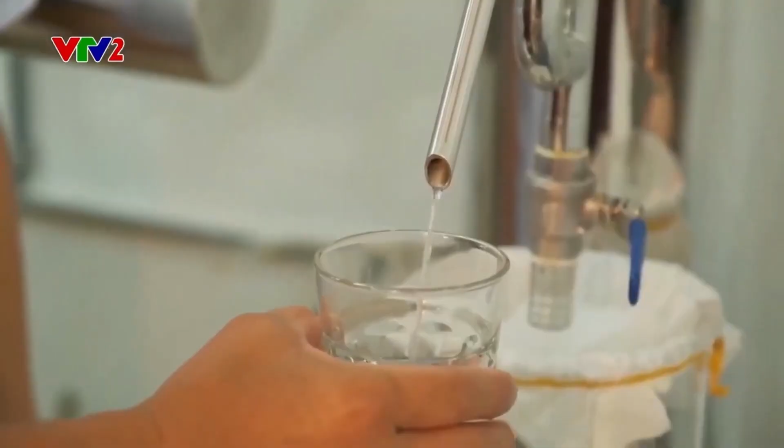Recognizing this, Thái An Engineering and Technology Company Limited, a member unit of Năm Sao Việt Science Technology Enterprise Group Joint Stock Company, a science and technology enterprise, has pioneered research and the application of scientific and technological advances into the clean liquor production process.

The company has built a clean liquor production process that is synchronous and closed-loop, fully ensuring food safety and hygiene conditions in accordance with the regulations of the Ministry of Health.

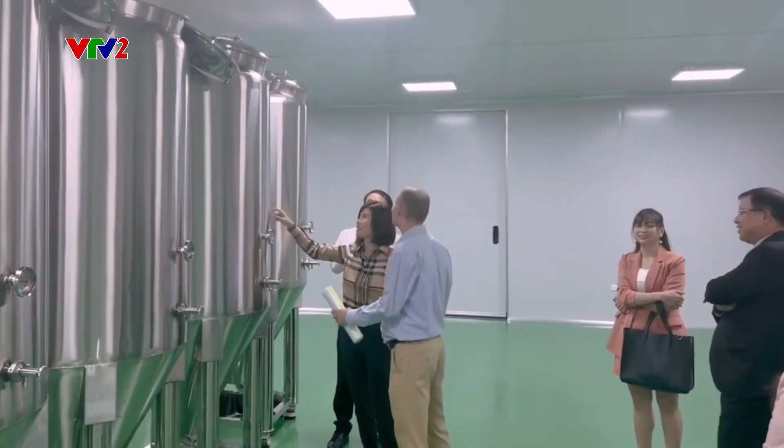Cooperating with Thái An in equipment investment and receiving the transfer of the clean liquor production process has opened up a blue ocean, a market area large enough to help Vietnamese liquor take the throne and bring business value to enterprises investing in this field.

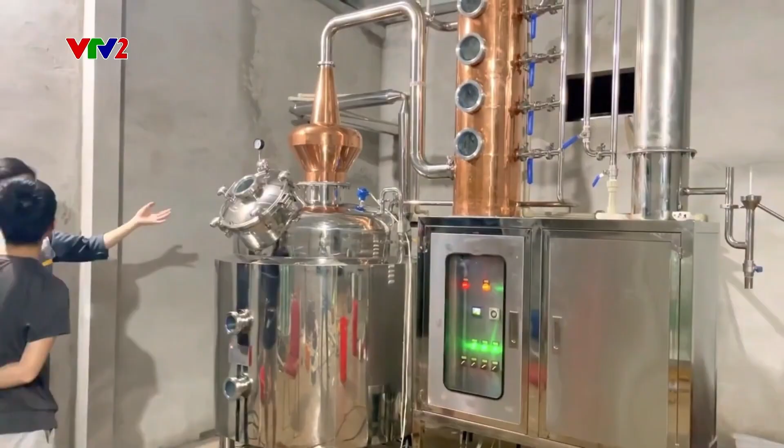It can be said that introducing a closed production process following the one-way production principle, standardized at all production stages, is the decisive factor for fermentation efficiency, contributing to increased productivity and enhancing product quality.

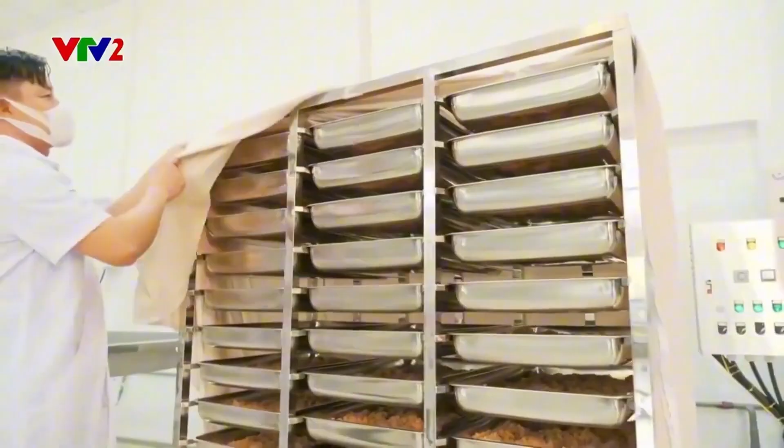The clean liquor production process, developed by Thái An, is an inheritance that selectively adapts traditional fermentation methods on a synchronous equipment line. The finished liquor retains the full flavor of the ingredients and ensures food safety and hygiene according to the regulations of the Ministry of Health.

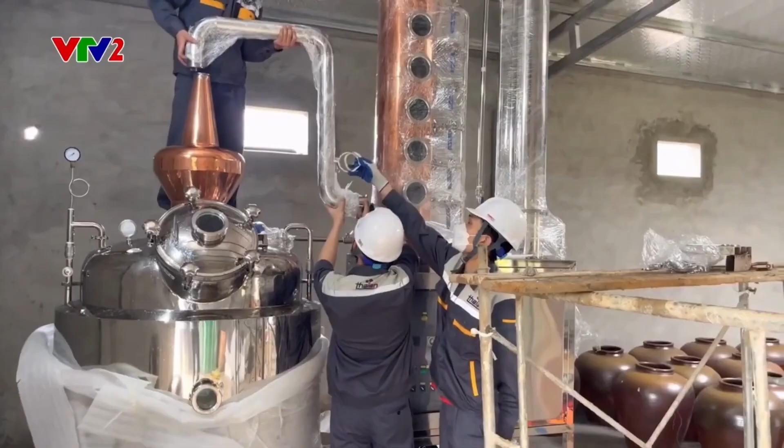To date, this technology has been certified by the Institute for Research and Development of Quality Standards of Vietnam, with many large-scale production facilities across the country applying it successfully and being well-received and highly rated by consumers.

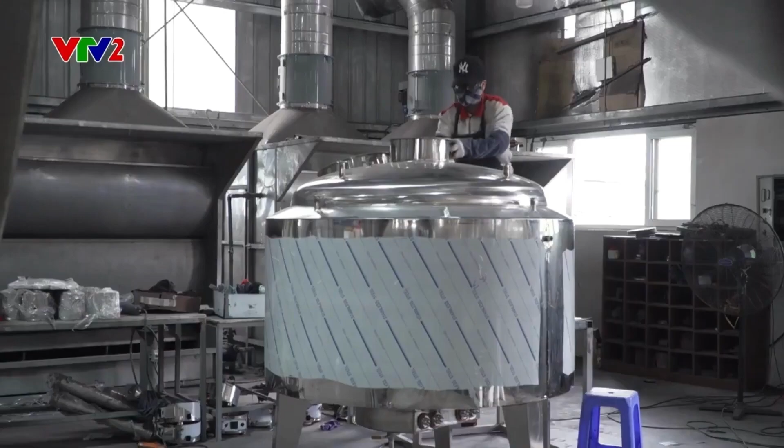To spread Thái An's clean liquor production technology further and make it easier for customers to access, we have produced this documentary to introduce to you in detail the clean liquor production process following the technology proposed by Thái An.

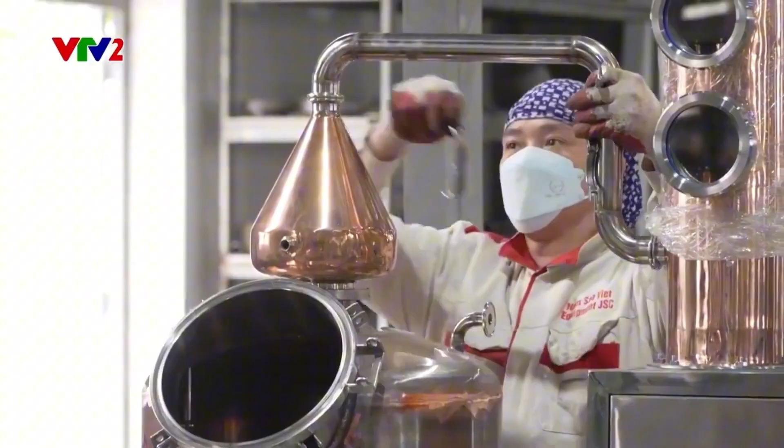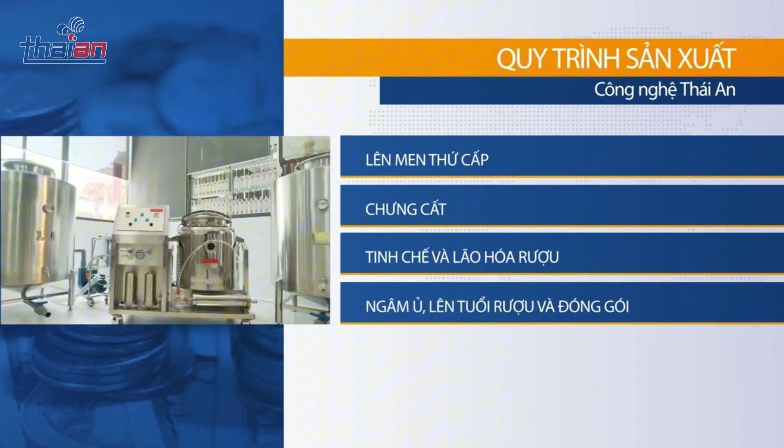Accordingly, the traditional rice liquor production process consists of 8 main stages. Step 1, ingredient preparation. Step 2, starch gelatinization. Step 3, yeast inoculation. Step 4, primary fermentation, the starch saccharification stage. Step 5, secondary fermentation, the alcoholization process. Step 6, distillation. Step 7, refining and aging the liquor. Step 8, aging to maturity and packaging.

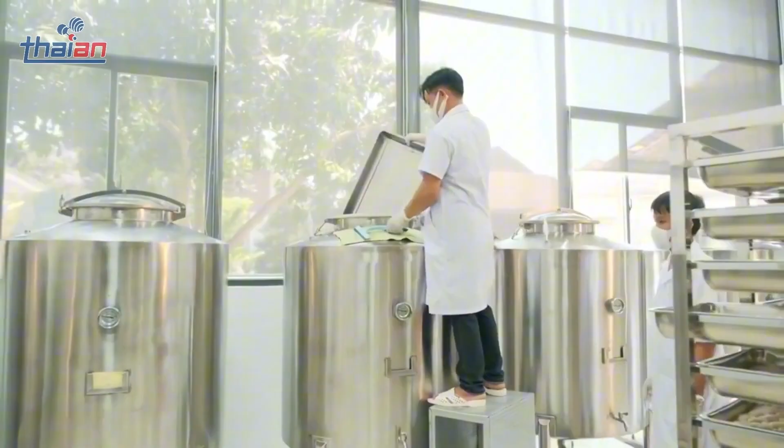The steps in the liquor production process are formed based on the method of producing traditional liquor of Vietnam, consulting with leading experts in the field of producing alcoholic beverages, ensuring food safety and hygiene conditions. The entire production process is carried out on a synchronous equipment system designed, supplied, and transferred by Thái An. The details of each production step are as follows.

Step 1: Ingredient preparation. Ingredients are carefully selected by workers before processing to remove impurities and insects mixed in the rice, then washed and rinsed under clean water. This action, besides removing dirt, also helps limit the effects of chemicals used for anti-mold and anti-termite purposes during storage.

The rice, after being washed, is drained before moving to the second stage, starch gelatinization. Depending on the desired flavor, we choose one of two types of ingredients: white polished rice or brown rice retaining the bran layer.

Starch gelatinization is considered an important stage determining the result of the fermentation process. Creating a traditional liquor product using traditional herbal yeast requires higher starch gelatinization techniques compared to using other types of liquor yeast.

Depending on each type of rice, the water level, cooking time, and rice incubation time will vary. During the production process transfer, Thái An technicians will guide in detail and accompany the customer.

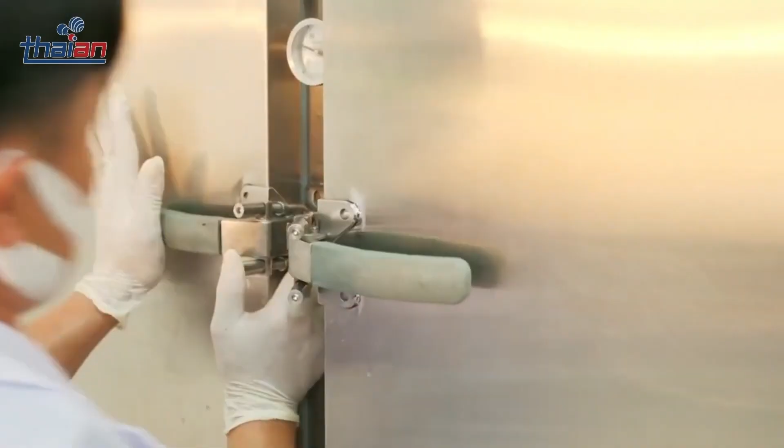The rice after the gelatinization stage must meet the following basic requirements. First, the rice must be cooked evenly, not dry, and not have an uncooked core. Dry rice affects the yeast absorption process, reducing the efficiency of converting starch into sugar.

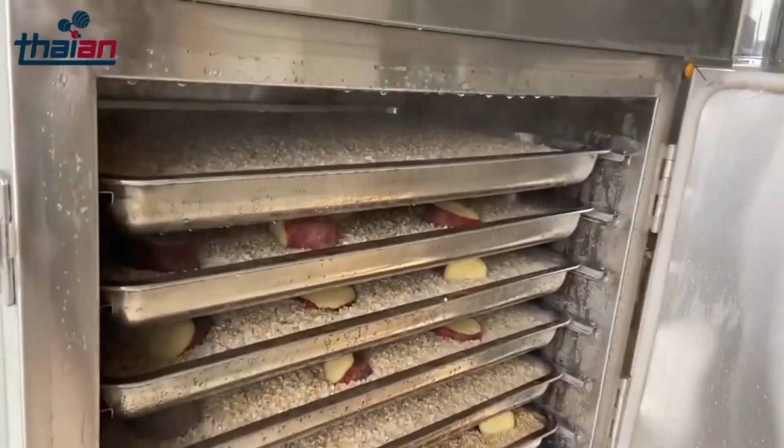Secondly, rice must not be kept too mushy or have grains break apart due to condensation. In this case, the yeast absorption process is poor, and foreign mold strains can easily develop, affecting the flavor and yield of the liquor.

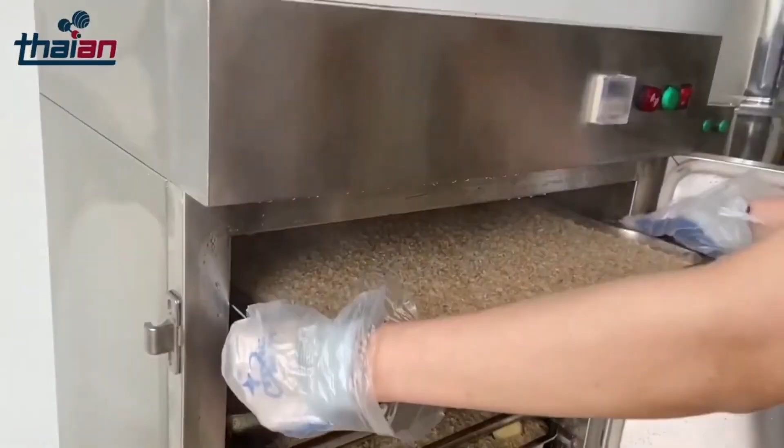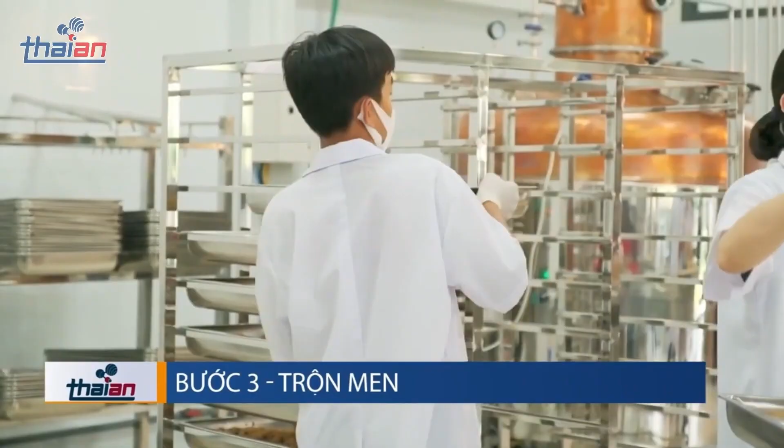Step 3, yeast mixing. Depending on the taste preferences of different regions, appropriate liquor yeast is selected. In Thái An's clean liquor production technology process, we recommend that customers research and aim to use northern yeast strains.

These are purebred yeast strains cultured in nutrient-rich substrates containing natural herbs, which resonate with the scent of glutinous rice to create the characteristic flavor of traditional liquor. At this stage, we need to note not to add yeast when the rice is still hot or the surface has dried out.

Step 4, the fermentation stage. The fermentation stage consists of two phases: primary fermentation and secondary fermentation. Before going into the details of each fermentation phase, we need to understand yeast and the nature of each conversion stage to optimize the entire fermentation process, aiming for the best liquor flavor with the highest yield.

For standard yeast, the yeast contains two common microorganism strains: mold and yeast. Each microorganism strain will perform a different task during the fermentation process. Mold will participate in the process of converting starch into sugar in an oxygen-rich environment. As for yeast, it converts sugar into alcohol in an anaerobic environment.

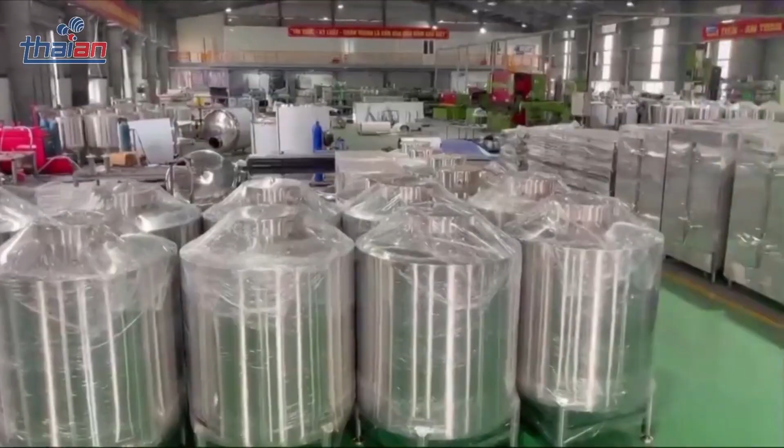Northern yeast has lower activity than other yeast strains. Therefore, it is necessary to use standard fermentation equipment to create a favorable living environment for the best growth of microorganisms. The primary fermentation process requires an oxygen-rich environment to help mold increase biomass production and generate many enzymes to maximally convert starch into sugar, limiting the symbiosis of foreign bacteria participating in the fermentation process.

The use of trolley racks and specialized multi-tiered trays from Thái An, with an optimized design where trays containing fermented rice are stacked on rack tiers, and the distance between trays is calculated so that air is continuously exchanged.

This helps to maximize the surface area of ingredients in contact with the air, creating favorable conditions for primary fermentation while making it easy to control temperature throughout the fermentation process.

In the secondary fermentation stage, in an anaerobic environment, yeast uses sugar to convert it into CO2 and alcohol.

Secondary fermentation, using specialized fermentation tanks, besides fermenting a large quantity of rice and liquor in each tank, helps save space and offers convenience in production, and also ensures an ideal environment for fermentation.

This includes ensuring an absolute anaerobic environment to help yeast maximally convert sugar into alcohol, preventing symbiotic microorganisms during fermentation, and overcoming the issue of sour liquor or the formation of scum on the surface.

Secondary fermentation undergoes two phases: rapid fermentation and slow fermentation. In the first 5 to 7 days, the product of the fermentation process mainly generates alcohol. After this phase comes the slow fermentation process.

Some esterification reactions occur, helping to enhance the liquor's flavor. However, also during this stage, if the fermentation tank is substandard and ingredients and yeast are not controlled, biochemical reactions will appear, creating unwanted compounds that reduce the quality of the liquor.

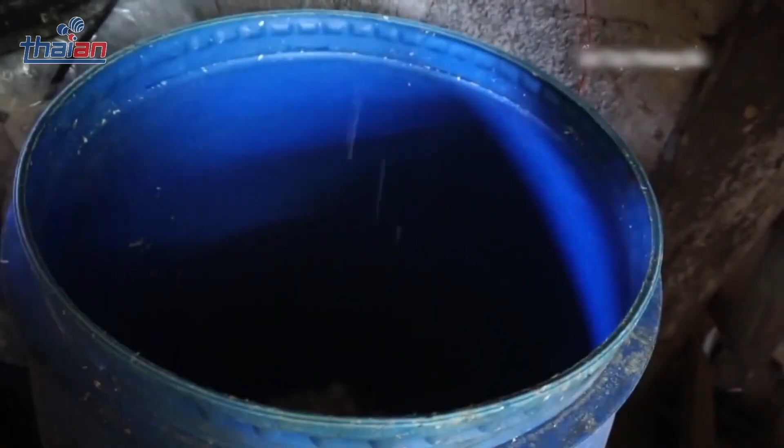A typical example is the intrusion of acetic bacteria, which use nutrients in the fermentation tank to create acetic acid. On the surface of the fermentation tank, much scum appears, resembling pickle scum or eggplant pickle scum, resulting in finished liquor with high acidity, tasting harsh and slightly sour.

Step 5, liquor distillation. Liquor distillation is the process of separating the mixture of alcohol and aromatic compounds from the solution based on the vaporization temperature of certain compounds.

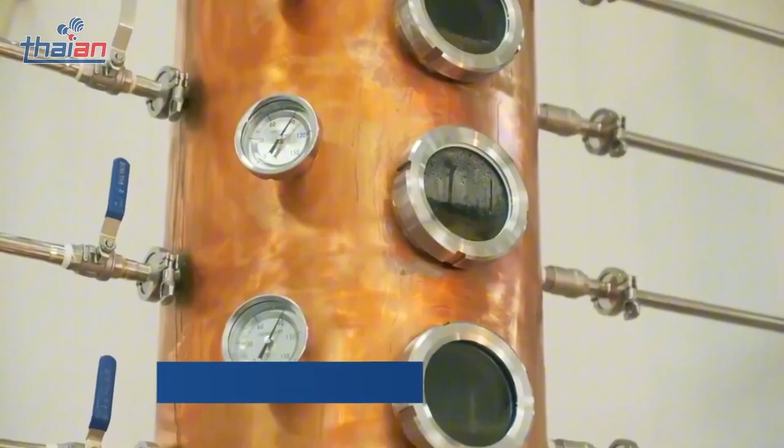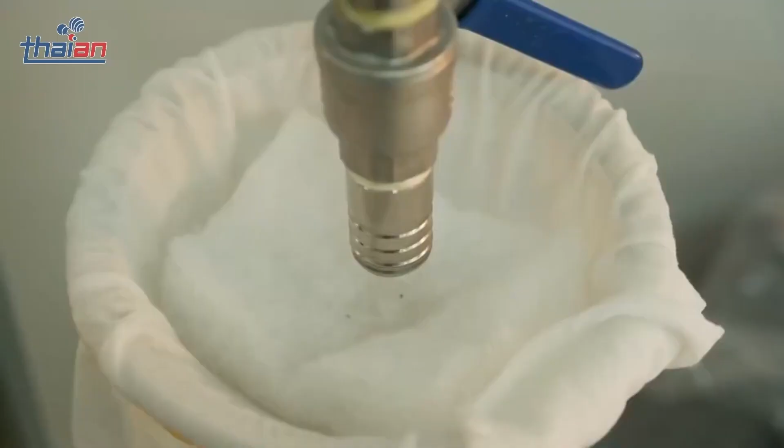With each compound having a different vaporization temperature, separating and recovering the desired compounds is not simple at all. In every country, there are different liquor distillation methods, each with its own advantages and disadvantages.

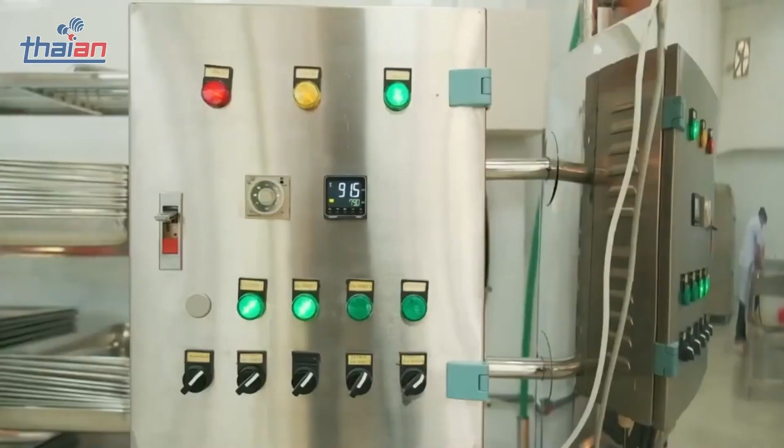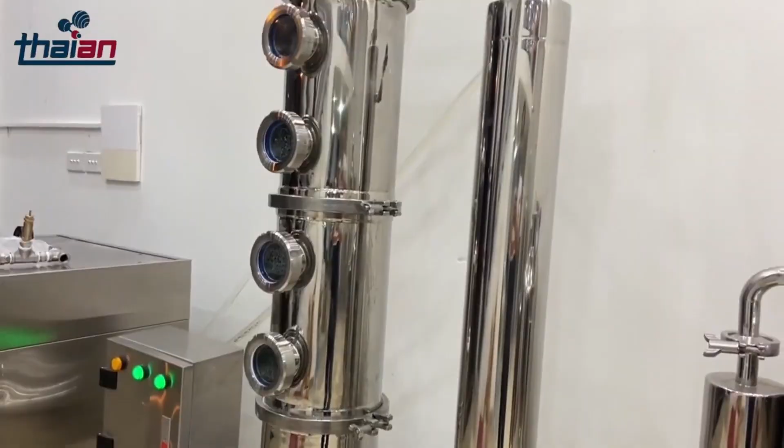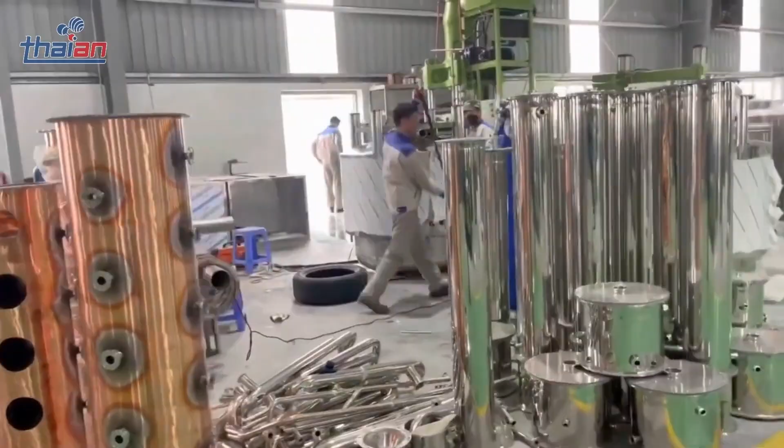In the clean liquor production process, Thai An's European technology multi-stage distillation tower is considered the heart of the entire process. This distillation technology is commonly used in developed countries, the homeland of world-famous liquor brands. It was researched, designed, and developed by Thai An Technology and Engineering Company Limited, Năm Sao Việt Group, since early 2017, with the desire to introduce advanced technology to preserve and enhance the quality of Vietnamese traditional liquor. Localizing this technology and popularizing it across almost all provinces and cities is gradually bringing true value to Vietnamese traditional liquor products.

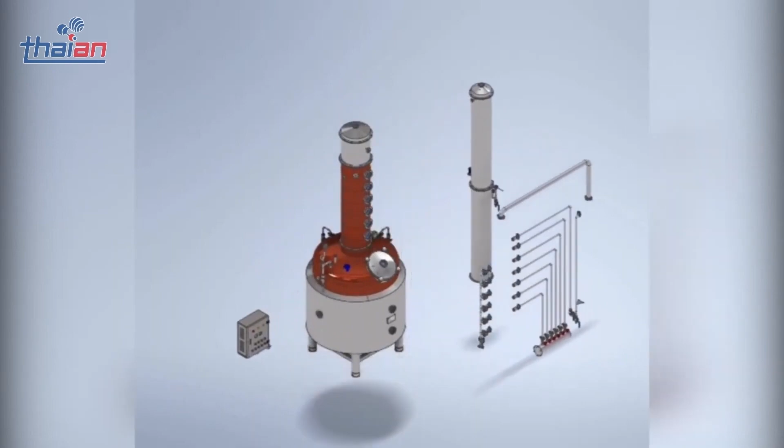Regarding structure, this equipment consists of 4 main modules: the raw material containment and heating chamber, the multi-stage distillation tower column system, the heat exchange system for liquor condensation, and the control module.

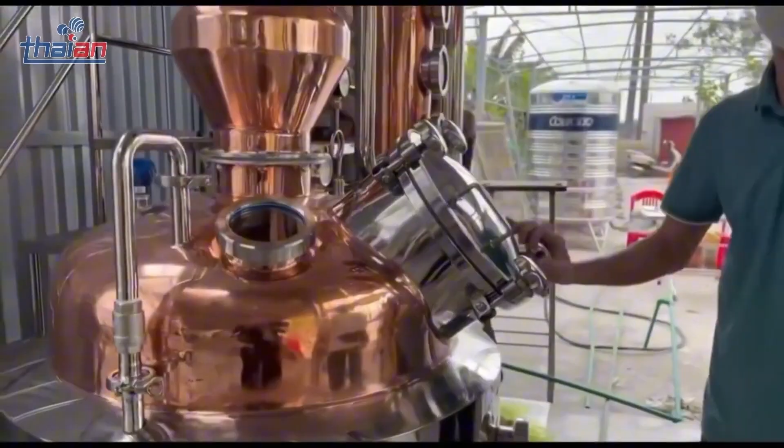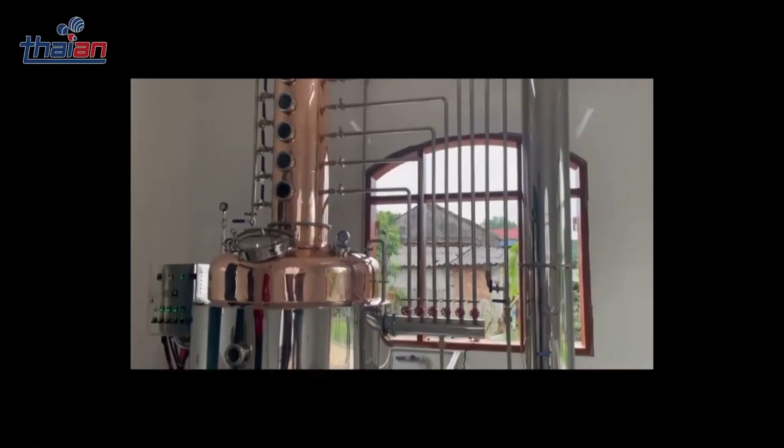The raw material containment and heating chamber has a capacity from 250 to 5,000 liters of fermented mixture, depending on the corresponding product code for different production scales. It uses diverse materials ranging from imported pure red copper to stainless steel, with standard thickness from 2 to 5 millimeters. Heating combines a 380 volt voltage source or saturated steam to optimize the fuel available at each production facility.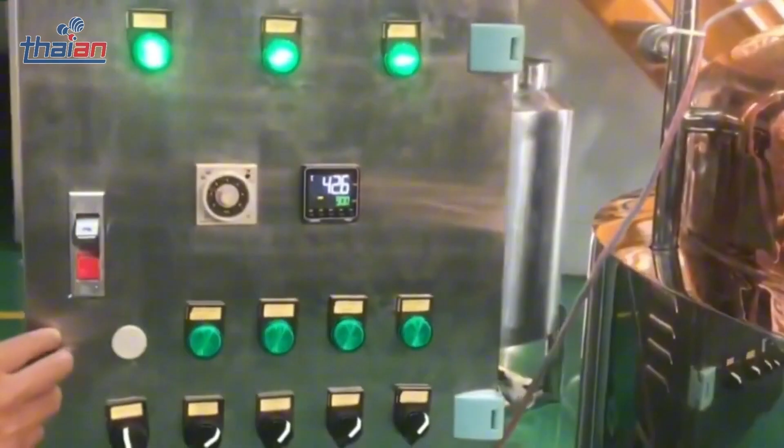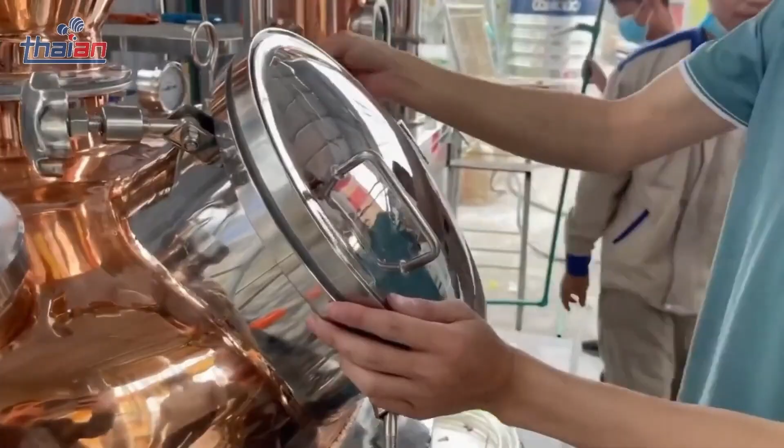Technically, the equipment is designed based on aerodynamic principles to optimize the heating process. The pressure balance assembly helps the heating chamber remain stable, preventing sudden pressure surges or negative pressure that could cause equipment deformation. Welds use laser welding technology, which besides ensuring aesthetics also helps the welds meet pressure standards in environments of heat and chemical corrosion, extending equipment lifespan and ensuring absolute safety during operation.

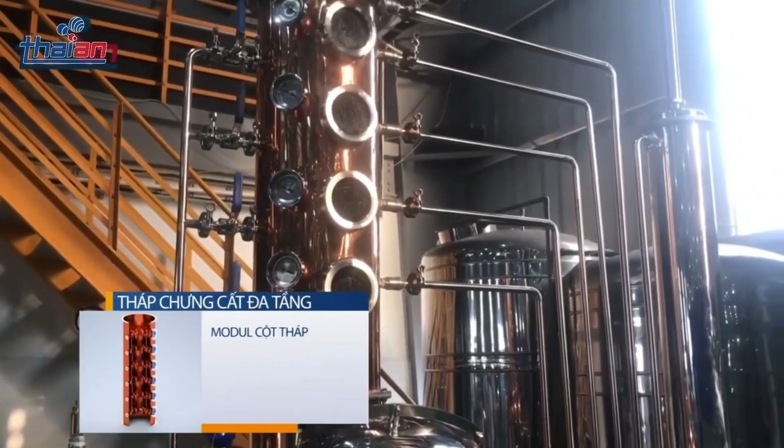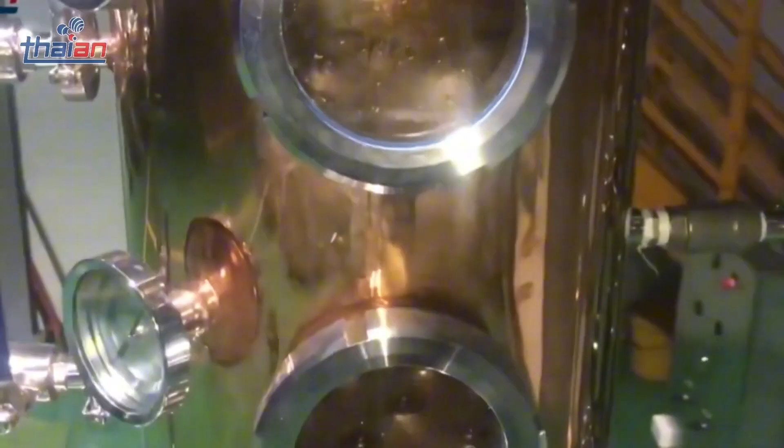The tower column module is composed of 100% pure red copper imported from Korea. Depending on the distillation capacity, the tower column diameter varies from 250 to 800 millimeters. Through 6 refining tower plates at each distillation stage, alcohol vapor passes through these tower stages in turn.

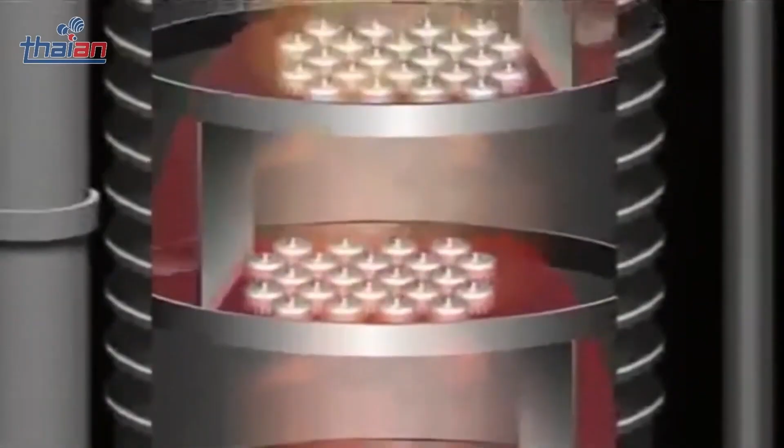With a special structure of bubble caps, the mass transfer process occurs on the surface of the tower plates. The process of changing state from gas to liquid is repeated multiple times, increasing the contact between constituents, which is the premise for chemical reactions to occur.

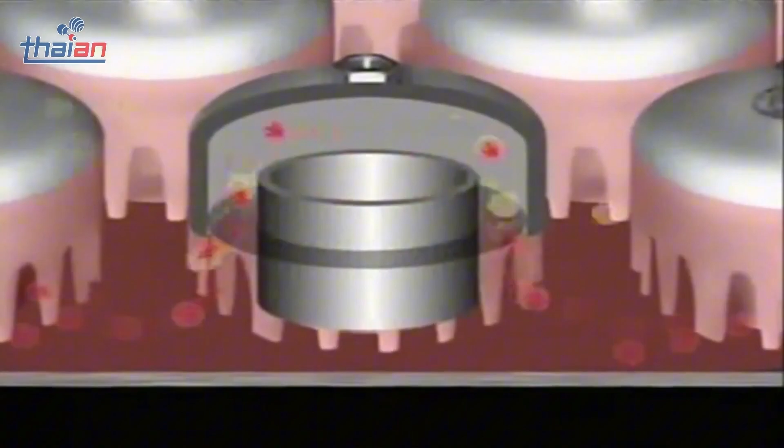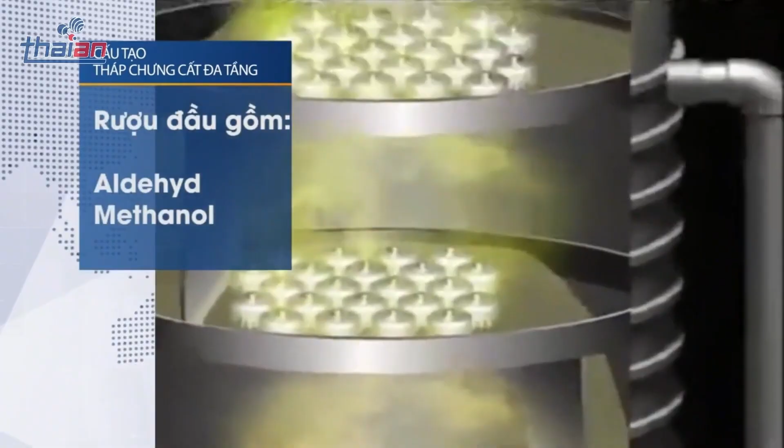Analysis results show that in the first portion of alcohol escaping the tower column, it mainly consists of light compounds evaporating at low temperatures, where the content of impurities like aldehyde and methanol predominates. These compounds not only create a pungent odor in the liquor, but are also the direct agents causing dizziness, vertigo, headache, and nausea for the user.

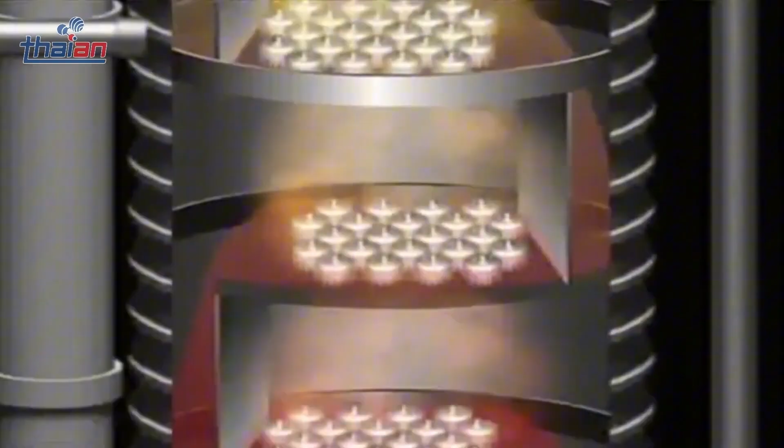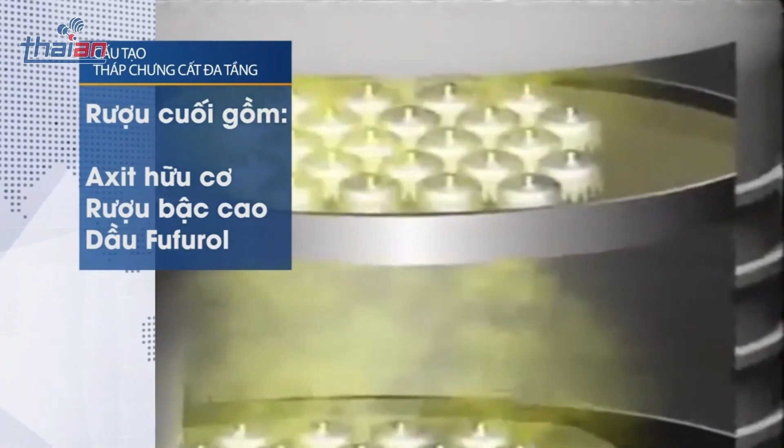In the final portion of alcohol, also due to physical properties, some compounds like higher alcohols rich in fusel oils and organic acids have high vaporization temperatures and large molecular weights. Therefore, when evaporating into the tower column, the optimal refining process causes these compounds to condense and quickly reflux to the stages at the bottom of the tower column, returning to the distillation pot.

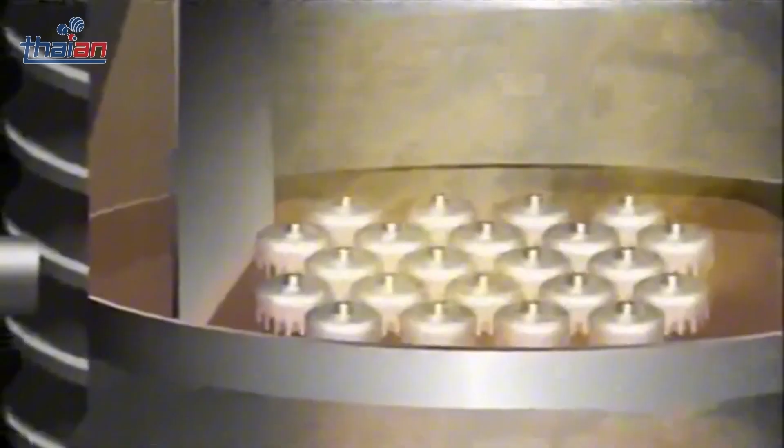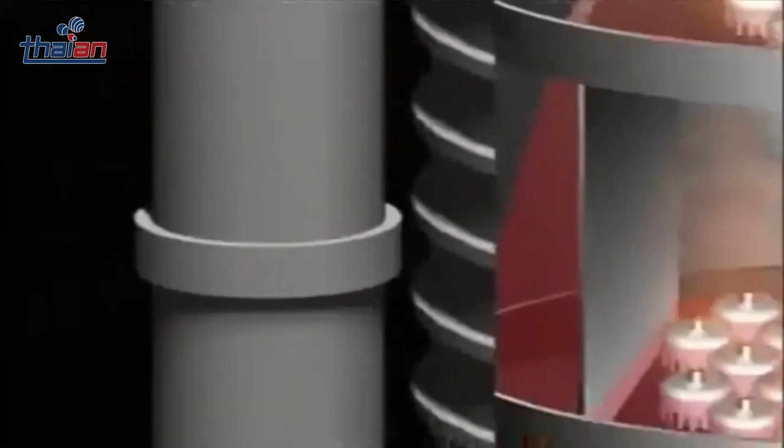This is considered the number one superiority that other distillation technologies cannot achieve. Removing these compounds helps improve liquor quality. The liquor no longer has a sour taste or the burnt smell of fusel oil. At the same time, the drinker does not suffer prolonged fatigue, since the body would otherwise lose a lot of energy metabolizing these compounds.

The middle portion of alcohol, also known as the heart of the liquor, is the traditional beverage bearing the rich flavors that any consumer or producer desires. Optimally separating the impurities in the heads and tails helps the liquor's flavor become pure, with a crisp taste and a deep, gentle aroma.

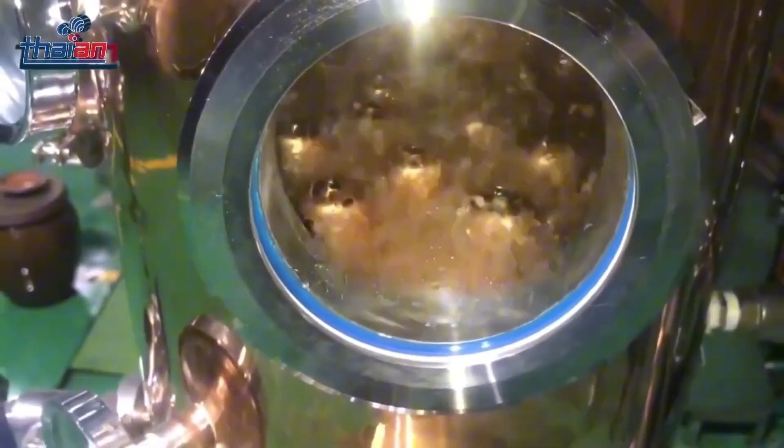There are 3 main advantages of the multi-stage tower distillation technology. First, it maximally eliminates impurities such as aldehydes, methanol, fusel oils, and high organic acids, substances that affect the flavor and safety of the product.

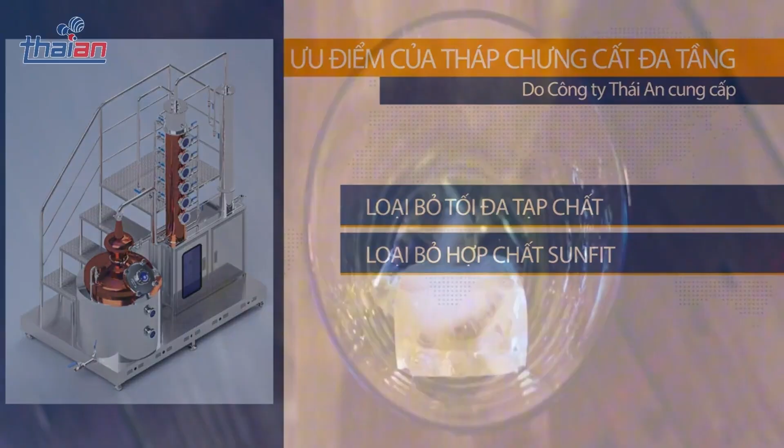Second, it completely removes sulfite compounds including SO2, SO3, and H2S, byproducts generated during the final stage of fermentation. These compounds have a burnt smell or the fetid odor of soaked bamboo. If not removed, besides being harmful to the body, they also reduce or destroy the traditional flavor.

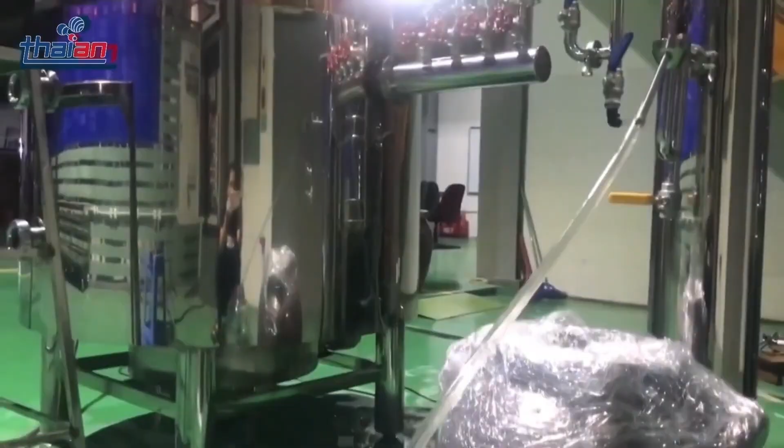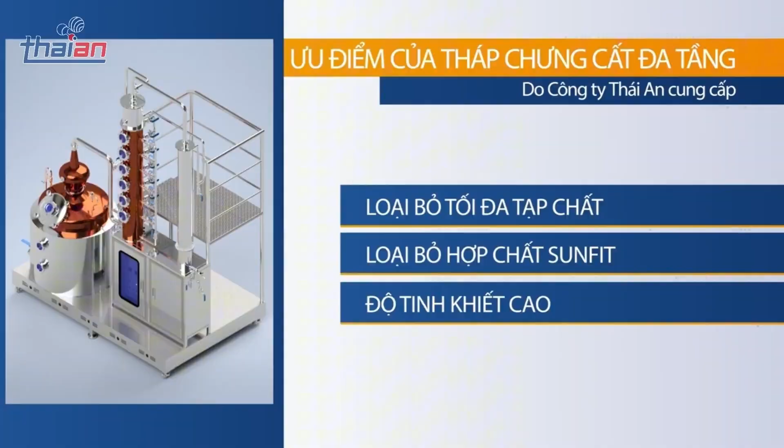Third, the finished liquor has high purity. When observed, the liquor looks as clear as spring water. The mass transfer process at the 6 tower stages, corresponding to distilling 6 times according to the single evaporation distillation method, ensures the liquor right after distillation has a sweet and soft aftertaste, like liquor aged for 36 months.

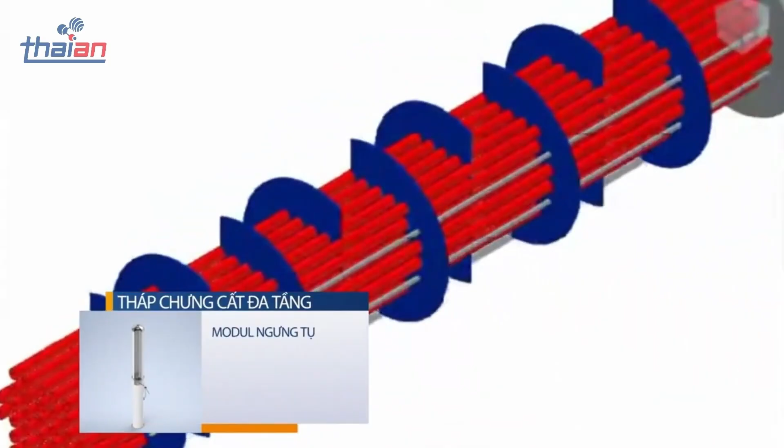Condensation module: the use of a shell and tube heat exchanger, besides optimizing space and saving cooling water, ensures the condensed liquor product always maintains a temperature corresponding to the inlet temperature of the cooling water, reducing liquor loss compared to some other heat exchange methods.

At the finished liquor outlet, the alcoholmeter is always placed in a static state, helping the distiller constantly control the alcohol content at every moment of observation.

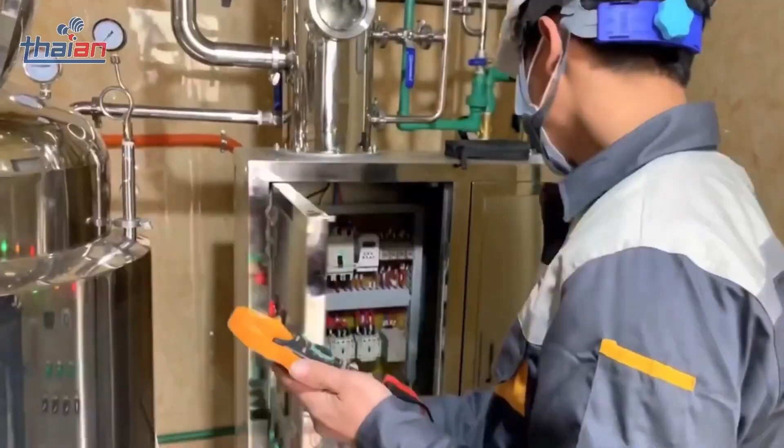Electrical control system: one of the fundamental factors when operating the distillation tower is stable control of the heating system at all times. Heat supply that is too high or too low directly impacts the quality of the finished liquor. When heat is high, steam generation pressure is great, easily entraining unwanted compounds, negating the value of separating the heads and tails through the distillation tower.

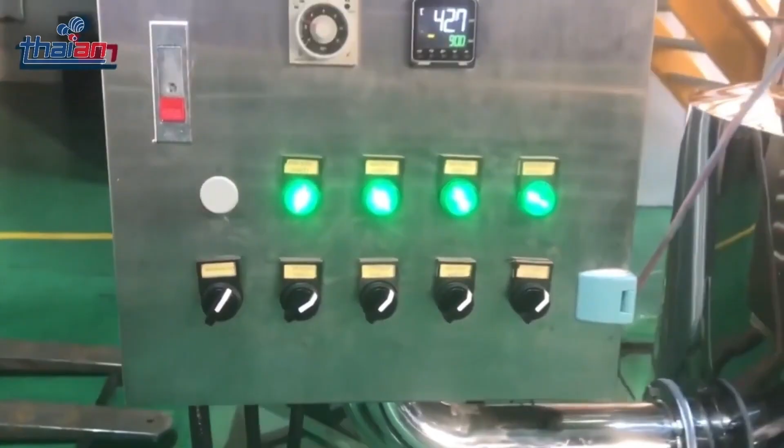Conversely, low heating prolongs the distillation time. At that point, the metal material constituting the tower is prone to changing its mechanical and physical properties, creating chemical reactions between acids and the metal material itself, forming other toxic byproducts.

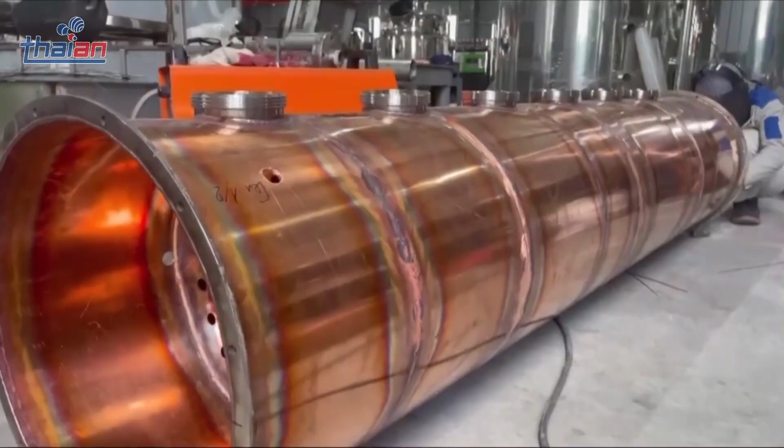A common example seen in copper liquor pots is that in cases of overheating or excessively long distillation times, the finished liquor takes on a brick red color. That is copper oxidation, the result of the chemical reaction between copper and organic compounds present in the vapor mixture from the fermentation broth.

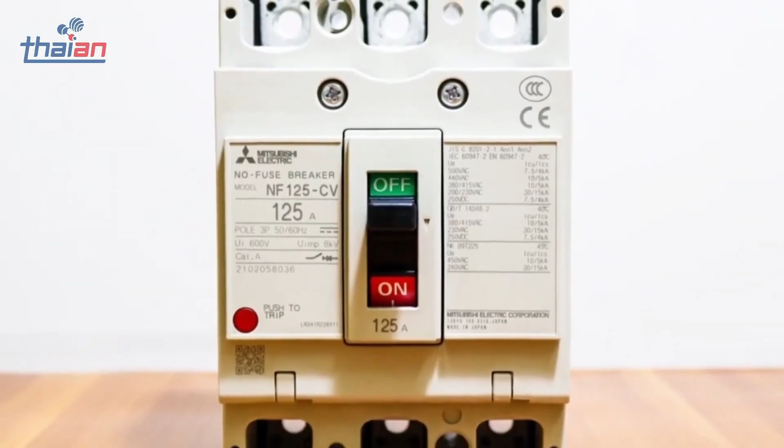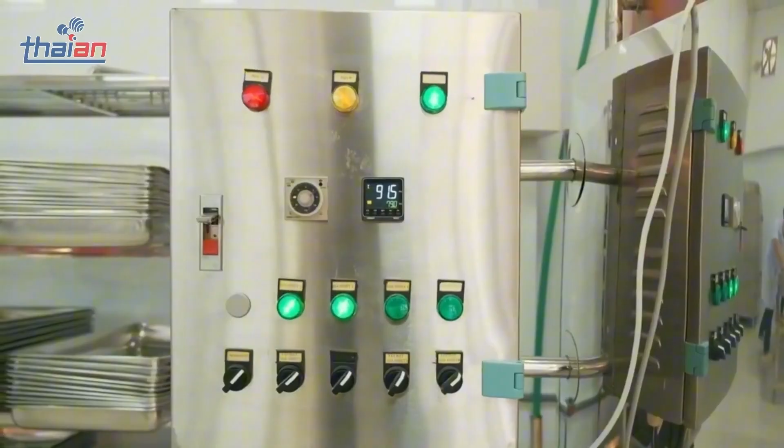Regarding the electrical system controlling Thaian's equipment, 100% of the electrical components used are genuine parts from Mitsubishi, Japan, offering high reliability. The entire distillation process is set to automatic. Operators do not intervene throughout the operation process. The heating system automatically switches on and off, helping to stabilize heat throughout the distillation process. At the same time, the solenoid valve system actively opens and closes to supply water for the condensation process.

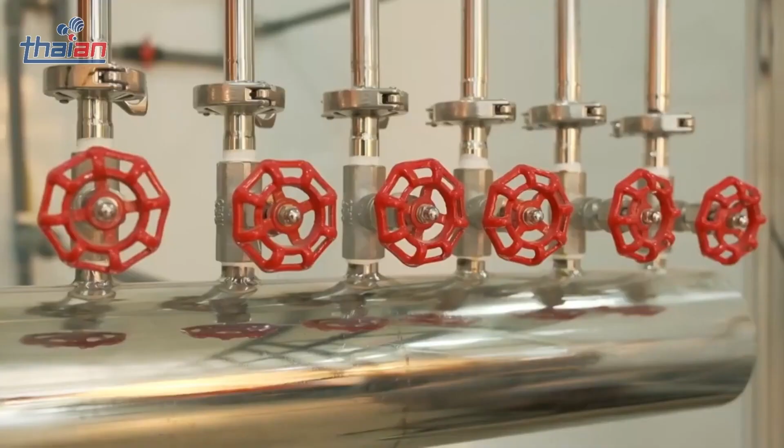Smart operation, safe equipment, easy to manipulate with high reliability are the conveniences brought to customers when using the multi-stage distillation tower from Thaian Engineering and Technology Company Limited.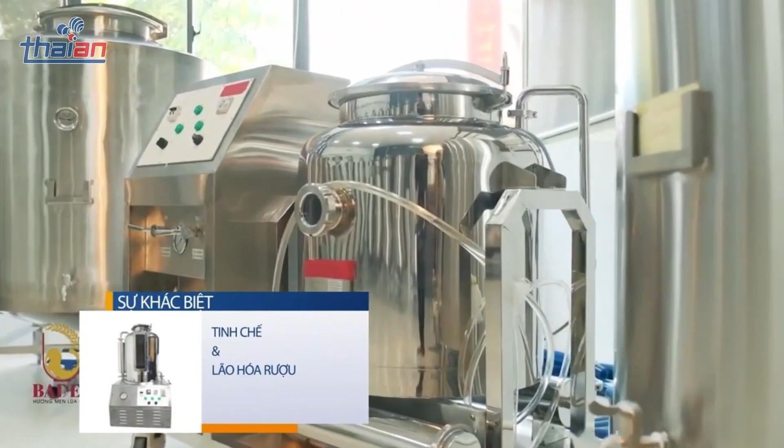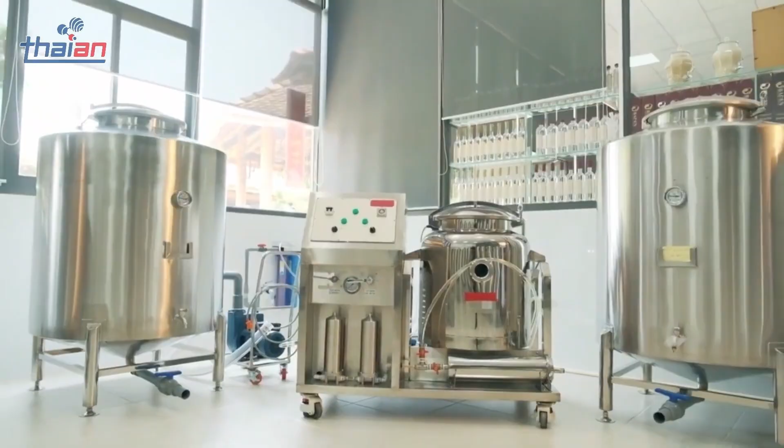The unique point and difference between Thai An's production process compared to processes proposed by other units is the liquor refining and aging step. So why, in the clean liquor production technology process of Thai An, is it mandatory to use refining and aging machines? Before answering this question, let us explore and understand the structure and bonding of compounds present in the liquor solution and how they work.

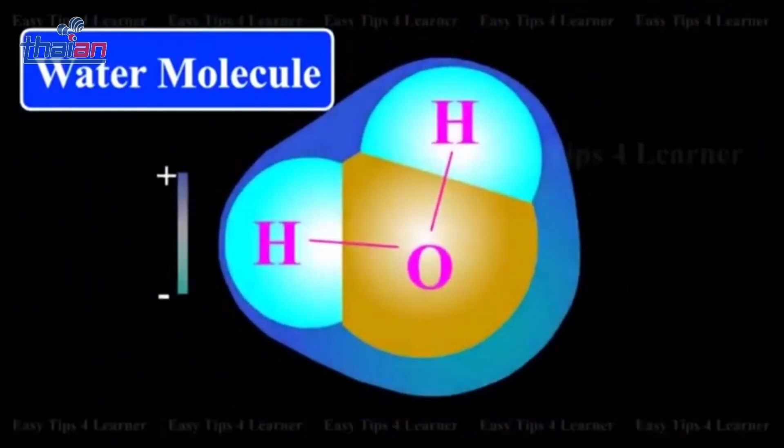The main components in the solution include alcohol and water. Regarding molecular structure, water consists of 2 hydrogen atoms bonded to an oxygen atom. They are bonded together by covalent bonds. Since the electronegativity of oxygen is greater than that of hydrogen atoms, the shared electron pair is pulled towards the oxygen, creating polarity within each H2O molecule.

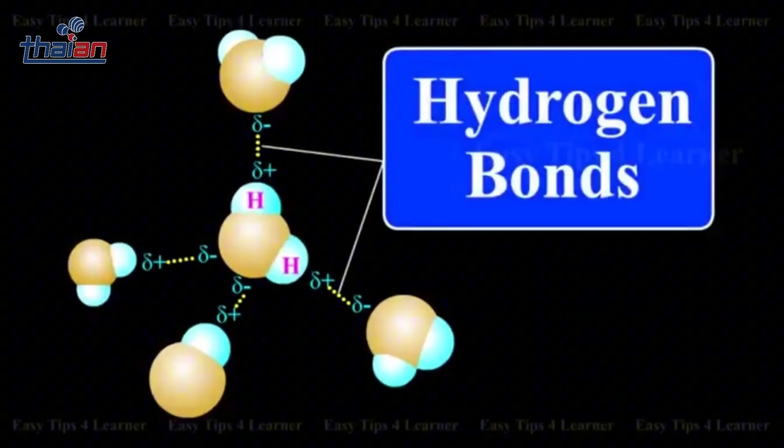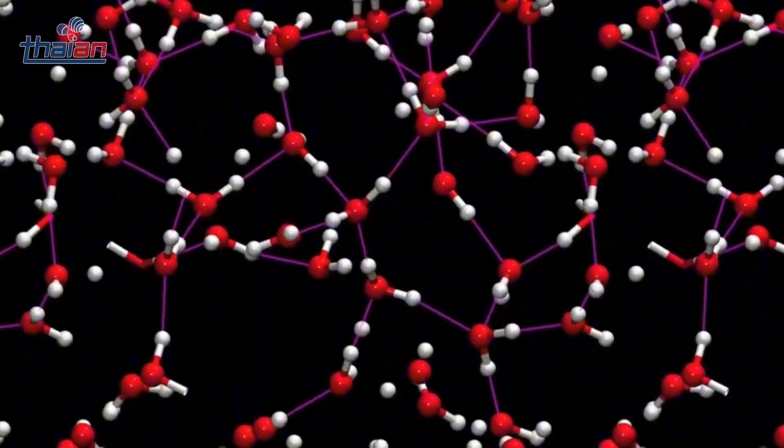Due to this polarity, H2O molecules do not stand alone, but often bond multiple H2O molecules together, creating water molecule clusters, also known as water networks. The bonds between H2O molecules in the water network are due to electrostatic attraction caused by polarity. This is an intermolecular bond. As for alcohol molecules, the OH group present in their structure also creates electrostatic attraction forces to bind many alcohol molecules together.

Therefore, the liquor solution mixture before refining and aging will exist in the form of water molecule clusters. This bonding and arrangement is non-uniform. They create localized pockets, and from these localized points, create shock, harshness, and difficulty in drinking.

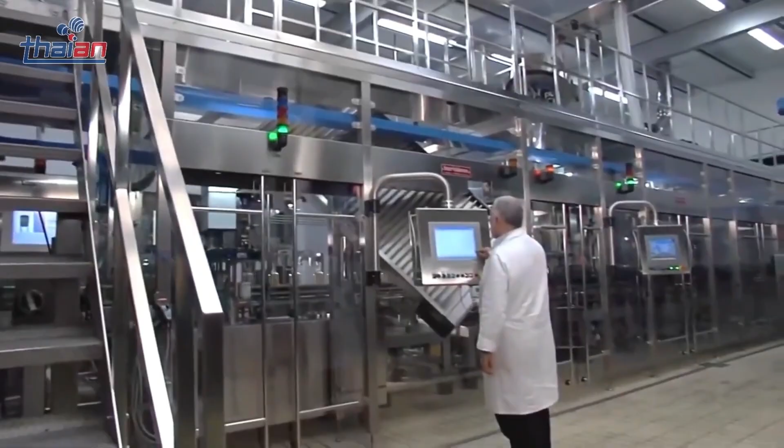Liquor aging technology is a technological product patented in the US for the first time in 1947. The technology has been applied in Vietnam for many years with the combination of high-frequency, ultrasonic waves, alternating magnetic fields, and multipolar magnetic fields. This combination of agents creates mechanical waves with appropriate amplitude and frequency to break intermolecular bonds.

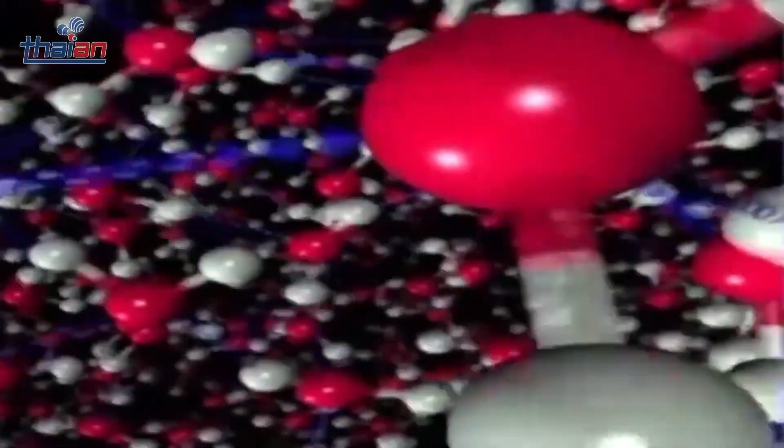The separation or fragmentation of alcohol and water molecule clusters forms oppositely charged electrons. Under the directional role of the magnetic field, electron pairs are rearranged together, creating uniformity among molecules.

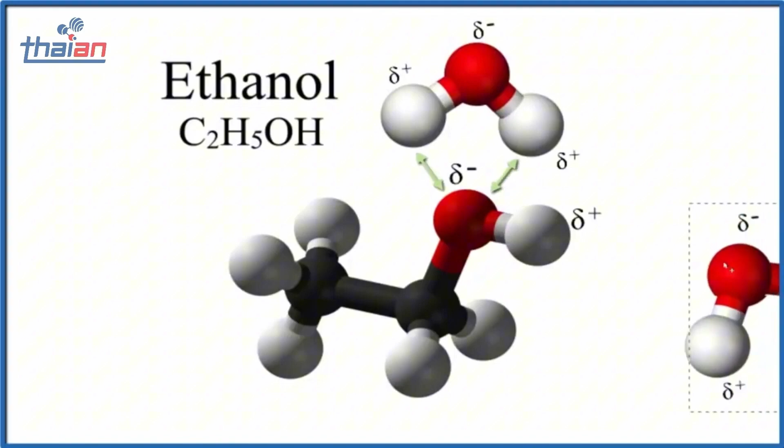The refining and aging process makes the liquor smooth, soft, and especially, the process of purging and eliminating alcohol from the body is many times faster than when liquor has not been aged. Due to the microscopic structure of alcohol molecule clusters, the body expends less energy during metabolism.